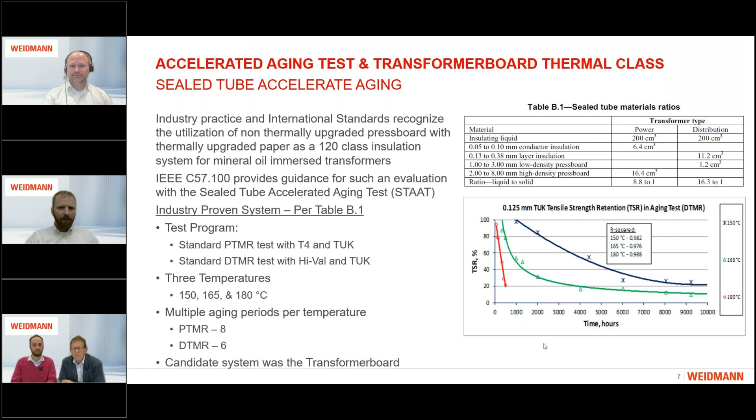So going into this test study, our problem statement was, can we determine the thermal class of transformer board using an industry recognized test procedure? Again, this IEEE C57-100. And what we determined was yes. By following these steps, we were able to confirm that standard pressboard, when used in conjunction with thermally upgraded Kraft paper in mineral oil, has a class of 120.

You can see in the right-hand side the life curve. Just picking one, this was the high val in the distribution transformer ratio. We can see the life curve, and then in the bottom right, showing we used three different methods to make this confirmation of the thermal class. If you're interested in those in detail, please go back and watch that previous webinar. But looking at it various ways, we can confirm that thermally upgraded Kraft paper with non-thermally upgraded transformer board in mineral oil is a class of 120.

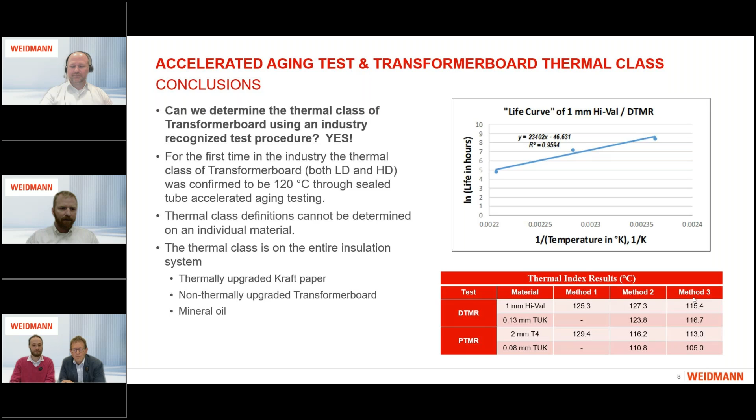Thank you. And with this, I believe I'll hand it back over to Jason. Yep. Thank you, Brad. All right.

So one of the other webinars that we did is what we called Optimize Insulation for Renewable Energy Transformers. As we're all aware, renewable energy is a very hot button topic. It's growing. It's a necessary new part of our global energy strategy. Here's a few things we pulled from here. You can see the projected growth. Actually, at this point, it's not projected. It is growth, and it's going to continue to grow.

If you recall seeing these graphs over time, it gets more and more renewables, largely wind and solar. Not necessarily a ton of other renewables, but you'll see hydro quite a bit in here as well. These are all growing, and it can have a major effect on what the load profile is and how best to utilize that and really to deal with it. Each of these lines, 1, 2, 3, and 4, correlate with the bullet points over here.

So it's the intermittent variable character, the unutilized excessive transformer capacity, i.e., is there a peak capacity that's still available that isn't being used? Different sites with different ambient temperatures, so your transformer could age quicker based on the load profile, whether it's a hotter ambient temperature or a greater load capacity required for that region, or line 4 here, this little one on the bottom, although the dotted lines 3 and 4 are juxtaposed and need to be corrected. You can see there's what we call not clean power.

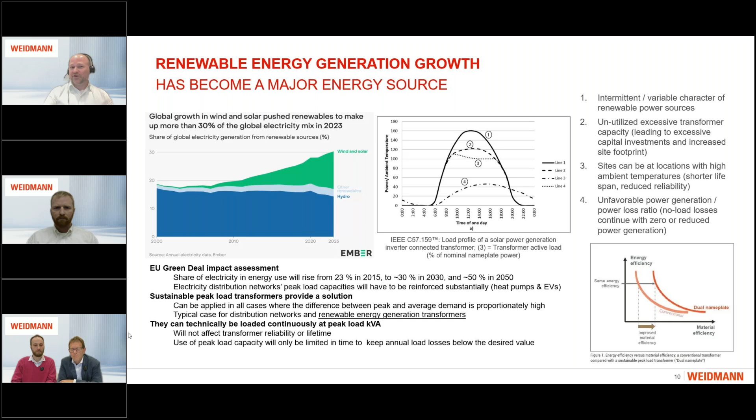And again, I encourage you to go back and re-watch these other webinars we did, because they get into a lot more of these details. This is a condensed version, what we're showing here. It's 30-some-odd slides down to 2 with a lot of little stuff put in place.

In that webinar, we covered designs of your typical, at least in this image right here, your US, Canadian, North American style distribution transformer, where you're looking at low voltage foil windings, high voltage copper conductors in many cases, the paper, single phase in this particular example shown here. And then we highlighted some of the benefits of using DPE, diamond pattern enhanced papers, to show where you may get some additional benefits out of it.

And this ties in nicely with what Brad was just talking about relating to thermal class and thermal index and the aging characteristics, as the DPE product allows you to get additional temperature profile or a higher temperature class with the same size design in many cases, or using a smaller design, you can get the same output as well. So again, I encourage you to go look back at this.

This is a condensed thing here, but what we're looking at is, combining with the increase of renewables and increased electrification, there's significant benefit for your layer wound transformer designs to use this DPE material to either get better output out of the same size or to reduce the size of the transformer and have a smaller footprint. And with that, we're going to move on to Lukas and sustainability.

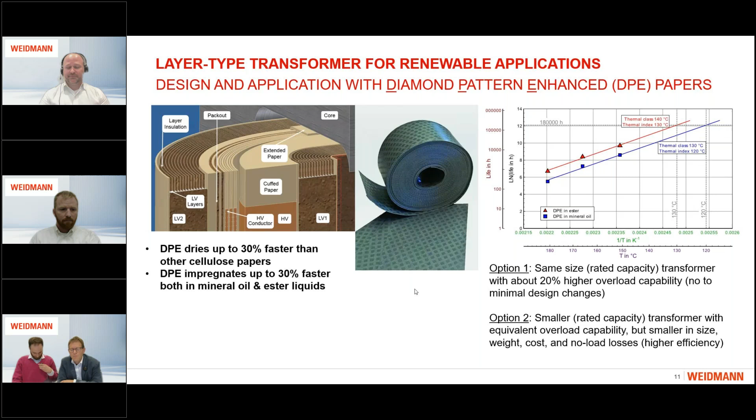Great, thank you. So you can go to the next slide, and we will, for the next 2 or 3 minutes, talk about sustainability in transformer insulation. Next slide, please. So for us at Weidmann, sustainability covers not only one area. One slide back, please. Yep, sure.

But actually it covers multiple areas. So on the one hand, we have, of course, the material that we produce and manufacture ourselves. On the other hand, we have the life cycle assessment of the whole product and materials that reach us. And in the end, also the regulation and specifications that are applied to these materials. And to really be able to make change in this environment, we need to have, of course, good communication with all the participants before us and after us.

And so if we look, for example, in the material range, we can see that in our playground, we can change maybe the amount of recycled fibers or the materials we use to laminate our board and make it more sustainable. However, we need to know, of course, how we can align this with your needs and our needs. And also for life cycle assessments, we need to be able to communicate with our partners the direct numbers to then assess this and optimize it. So this is for us really a thing: in this changing energy sector we need to make good communication possible with each other to really advance in a sustainable manner.

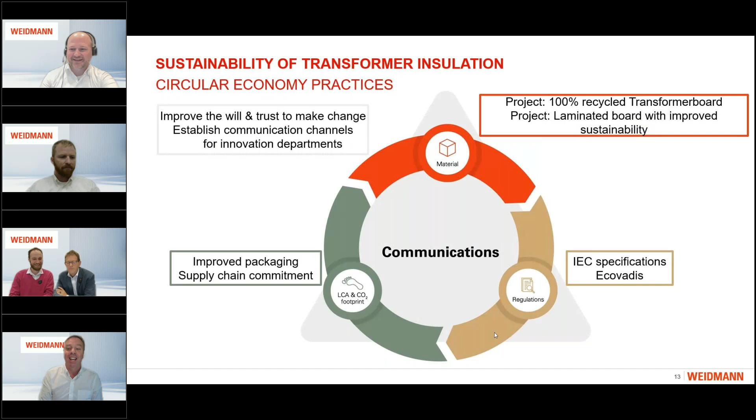Thank you. Okay. I have a question from the very famous and frequent question provider, Mr. Krauser, formerly of Weidmann. He references a specific slide. So Jason, you may need to be ready to adjust. So slide 4, bottom left. So if you can get back to that one. Right. Is it showing on the screen?

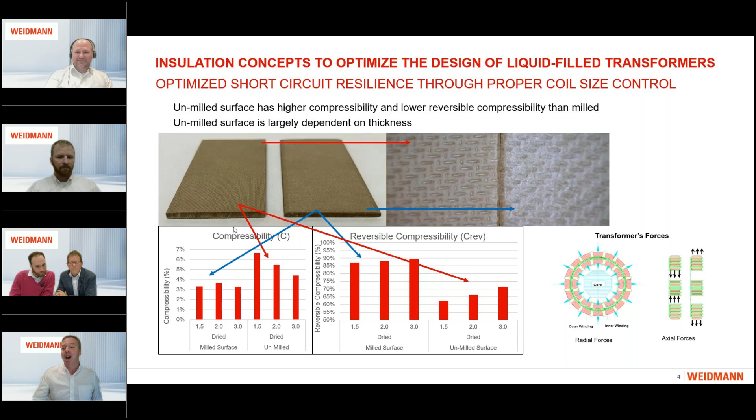Yep. Okay. The question from Christoph is, were these 3 different spacer thicknesses? And there was a follow-up to that that says the numbers shown are relative permittivity, in brackets epsilon r. I'm not entirely sure how to translate that question, but I'm hoping that you understand the question. So were these different spacer thicknesses, and the numbers shown are relative permittivity? Yeah, I can answer this question here.

So the charts in the bottom left, the compressibility, those are 3 different spacer thicknesses that you see, both milled and the unmilled surfaces. And one of the things trying to highlight here is that by milling off the surface, you have much more consistency in your compressibility and the reversible, and very little change between the two compared to the unmilled or leaving that screen pattern intact surfaces. You can see 1.5 millimeter unmilled is widely different than the 3 millimeter unmilled.

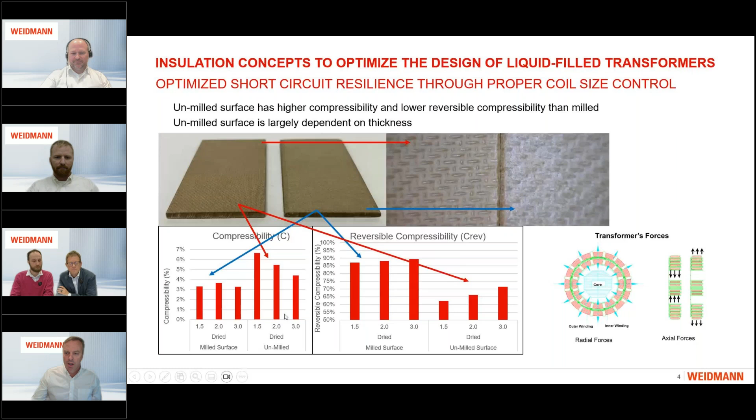So is it safe to say that this is 1.5, 2, and 3 millimeter, Brad? Correct, yes. Okay, thank you. So that is the spacer thickness. Really just, again, to highlight, by removing that screen pattern, we can have much more consistency in the products. Okay, and then Frankie, the second one was, I apologize, could you repeat the epsilon portion of that? Yeah, slide 5. The numbers shown are relative permittivity, in brackets epsilon r. Is that right? Correct.

And for what it's worth, this is what we're looking at here, the various relative permittivities, epsilon of mineral oil, 2.2 in both cases. And then what we were showing in this previous presentation was really the best way to utilize high density and low density materials to get a more optimized dielectric design. So what you're showing here is high density pressboard in mineral oil versus low density pressboard in mineral oil. So the epsilon values that we use typically for those are shown in each of these different boxes. Do you think that answered the question? Not sure, but I have a feeling the browser will let me know.

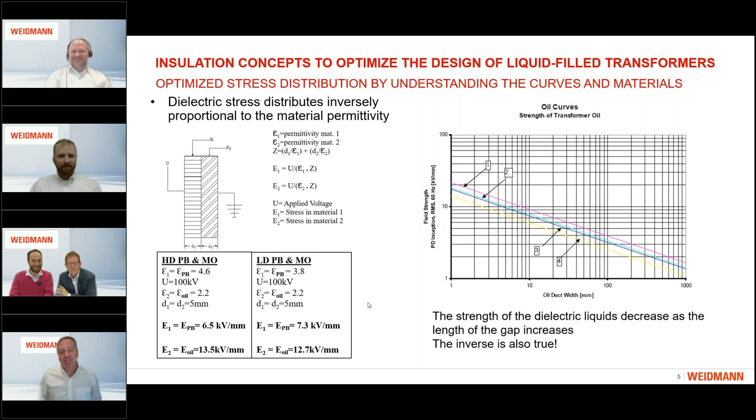So just to move on there, I would like to ask another question about DPE. So how does DPE impregnate or dry up to 30% faster when resin material acts as an additional layer? Was the question. Can somebody shed some light on that one, please?

Yeah, so first, talking about the resin, I would say that we are comparing DPE, or this epoxy coated paper DPE, compared to DPP. So we have the same epoxy layer in both samples. So any impact that that layer would have, we'll have it on both. So we can say that, yeah, perhaps it plays a role. However, it would play a role in both standard Kraft paper as well as the DPE paper.

Right. And to add on to what Brad just said there, it's not a full surface coating of the resin. It's that diamond pattern that goes on, which additionally provides a small channel for the insulating liquid to go through. So most of your liquid impregnation into DPP or DPE goes from the bottom or top in. So if you had a sheet, I hope this shows up with the filtering of the background behind me.